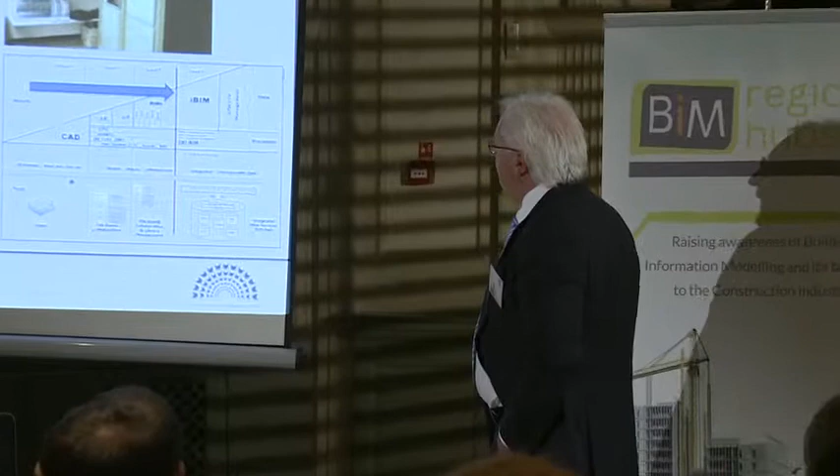For anybody who knows the history of CAD platforms, it was called Oxys, BDS, GDS, and there still are some of those extant around the country. It was a multi-user system used by engineers, architects, medical planners, administrators, surveyors, you name it. Anybody who was involved in hospitals could use that system. A bit of a forerunner to today's so-called BIM systems.

We were also one of the first digital contractors to Ordnance Survey, creating highly structured, quality-controlled information, which you probably now use as bases to your maps, although actually perhaps not around here you don't. We digitised the first 100 packages around Hanger Lane gyratory in London.

From then on, you'll see us sat in some little computer stuff there. That cost £90,000 in 1979. If you extrapolate that onwards to today, that's about 550,000, 600,000. So from then to today, I've been...

Involved in working with people to cooperate better, cooperate more, with the support of IT. In the interim years, I've been involved in quite a few national and European research projects.

Look, I'm back here at Newcastle. I worked there for 8 years, creating a large-scale, long-term property database. Likewise at Stoke Mandeville. And I've been involved in teamwork, I've been involved in Avanti, I've taught young architects - I am an architect by background - young architects, management, practice and law and business, and on into the future, researched into cyber law and virtual agents.

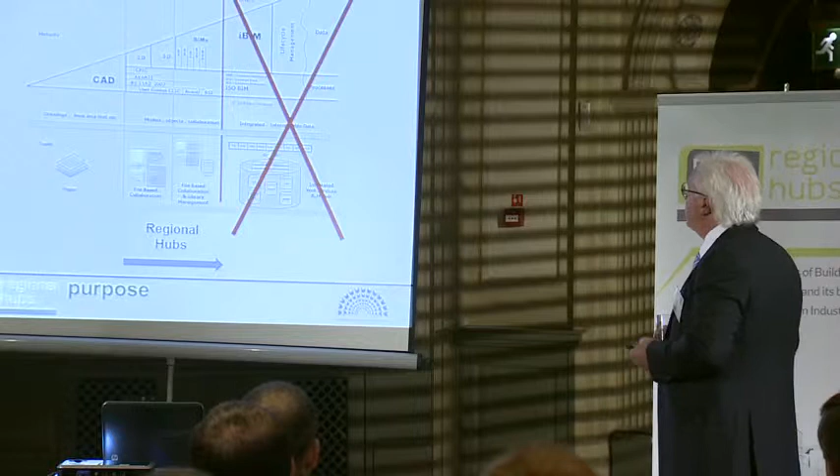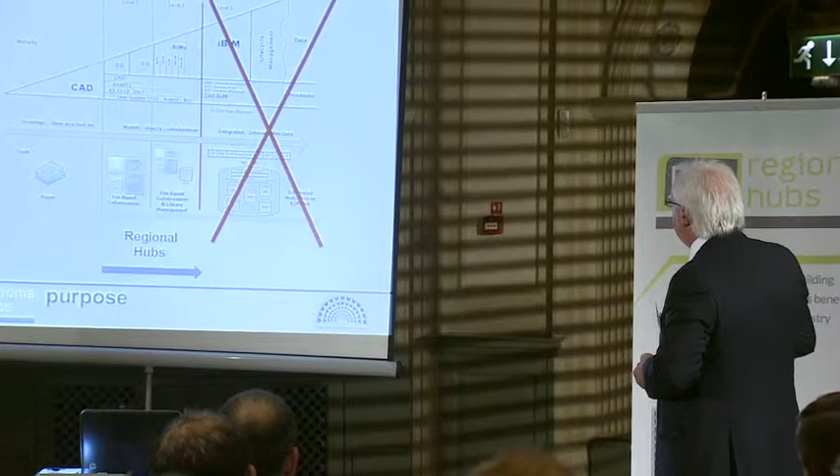What's the purpose of the hubs? Well, the big picture is to get to what is being called BIM Maturity Level 2, that red line there. But historically, as I've hinted at from that 1979 slide, we started out with paper, emails came along, 2D CAD came along, we had difficulty assimilating that into what we do. A lot of people simply used 2D CAD to produce a sheet of paper, which was passed on to somebody else who took that sheet of paper and used it as their CAD input. There's very little coordination, cooperation, benefit and impact at all at that stage.

Eventually, things like 3D came along, not just for visualizations, but for scheduling, environmental analysis, structural analysis, and more importantly, some of these things. CPIC - I was privileged to be one of the 2 lead consultants on the Avanti project, which was a 3-year project supporting people on cooperation using IT. BS 1192, I've sat on that committee on and off for a long time. These things came along and gave us the ability to structure our information better.

And that's what we've got to do even more in level 2. So the purpose of the hubs is to help people get to level 2. And how pragmatically, practically on the ground can we do that? Well, there is this thing in the middle, PAS 1192. And it's a standard demonstrating how to structure information, demonstrating how to give information various statuses as it moves through various stages.

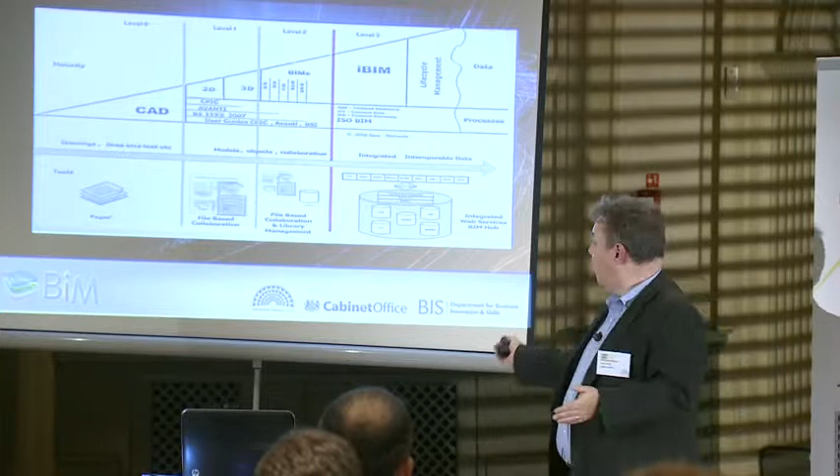Another key one is fully collaborative BIM. Steve's shown what level 2 BIM looks like, and what you will start to see at level 2, that collaboration is still domain specific. It's still an architectural model, a structural model, the FM model, and it's all federated together at a point in time for a purpose. We're not at level 3 yet in the UK, and what we will perhaps see is the supply chain going even faster and striving towards that. I think the technologies will get there pretty fast, the contracts will then fall behind. The big part will be changing behaviours. It's hard enough getting people to collaborate, but getting people to fully integrate, it'll be about changing that heuristic bias.

Most people look at that maturity wedge and I think, do they really get it? There's a slide if it comes up. I think this describes it quite well. You can start to see, again, what we're talking about is a series of models that come together, a series of data sets that are all pulled together and brought together for a purpose. It's not that single model environment as yet.

Well, what does that mean? It means from a commercial and insurance point of view, not a lot has changed. In our very first job at the MOJ, Cookham Wood, traditional JCT contract, it was very much fit for purpose. So level 2 BIM does not need a lot of ambulance chasing, there's not a lot to do. We're in the process of finishing the UK BIM protocol that will answer all these questions, and we're almost there in terms of publishing that. Lots of misconceptions around what government wants.

A lot of people think it's a bit of a fad, we'll stick our head in the sand, and hey, once Paul Morrell retires at the end of the year, it will be gone. This is very much part of policy now, embedded within the government departments. And it's only for jobs over 50 million, so it ain't going to affect me much. Well, 50 million is where we started, then it came down to 15, then down to 5.

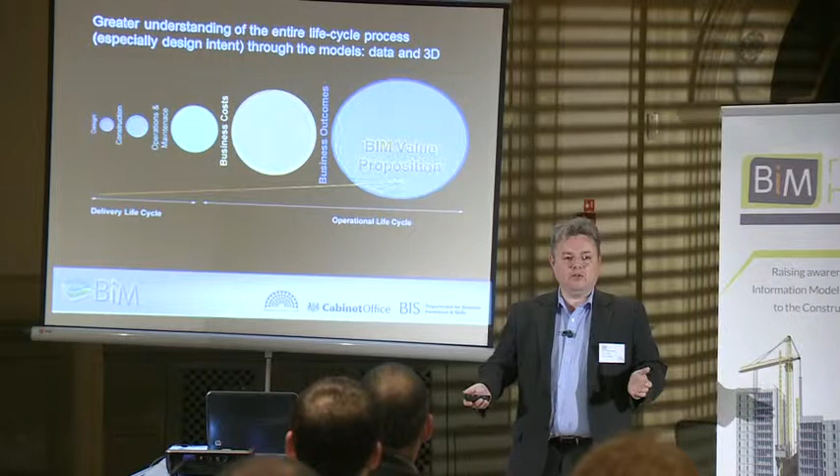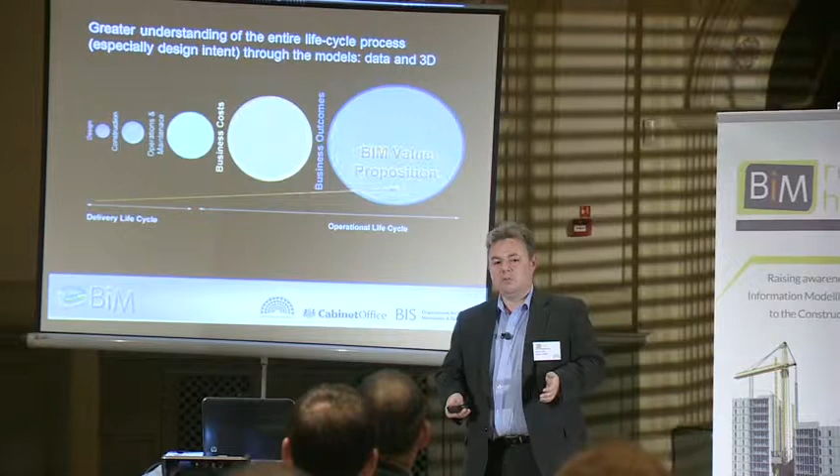The other profound thing he said within it is, well, we had this paradigm where we think about delivery life cycle - the 1, 10, 100 in terms of design, construction and operation. But the big value lies beyond delivery, in terms of operational life cycle, business outcomes and business costs.

How do we start using BIM to make better assets that are going to perform better for clients? We often design something, build it, and hope it's going to perform some way. BIM, through that 360-degree feedback loop, means we can start thinking about smarter business outcomes right at the start - start thinking about better operational life cycle, and that's where the real big saving is.

We get some good savings in terms of design, construct, but the further it goes up, the better the value proposition in terms of what BIM is. So starting to think about certainty in terms of that entire life cycle process, not just one small part of it.

As I mentioned at the start, you're probably thinking what's Forrest Gump about BIM? But we hear this all the time: we just don't know what we're going to get. We'll go through this design, procurement, construction, and we get an asset, because you've always thought about the form. Government departments are now saying start to think about performance, start to think about predictability, and give that performance I want. I think that's the big thing BIM gives you: that precision of data that can start to answer questions in a much more consistent manner, right for that whole life cycle planning.

How many people know about government soft landings? Show of hands - I think it's good, I'm quite pleased there's a bit more. As part of the government construction strategy, there is one called government soft landings, and it's not just at that point between construction and operation. It's right for that entire asset life cycle, but it starts to bring about BIM in terms of care of assets, and also asset information modelling or asset care. Soft landing is, if you like, that golden thread. Government soft landings became policy on the 20th of September. We do have a framework in place, so we will now have to start thinking, both in parallel, about data right through the entire project life cycle.

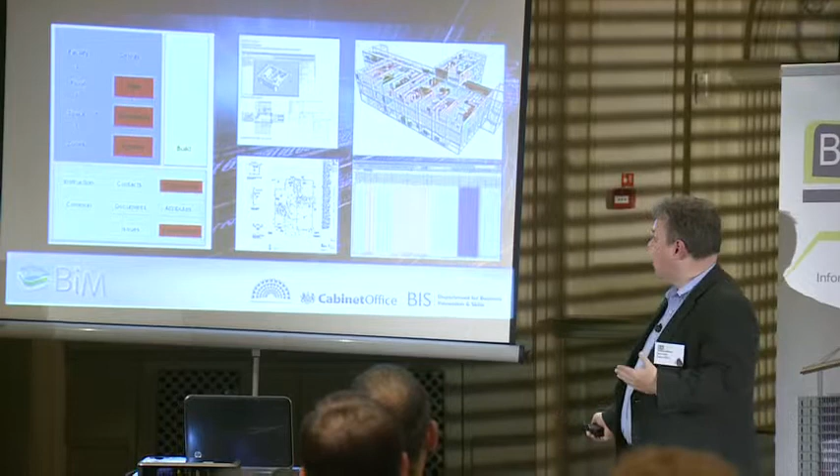So COBie, think of that as a common data set for government in that structured manner, and we'll show an example in a minute. Key thing as well, it creates that perfect landing, we can start to harvest all that information. We've got the common language, we take the data from the model, and pull it right into that asset information model. Government has at least 20 different pieces of CAFM software we need to do that with, so having that common language is certainly key. And that means we can start to get those assets to perform optimally.

You probably can't see it, but we do have a use for this, it's not just a case of asking for data. Bit of hierarchy down at the bottom, at full atomic detail, we can use it to look at systems right down to that component assembly level. The next level up, cut in a different way, we can think about forward planning, right up until we make strategic decisions at treasury level. So one data set, cut in different ways, can answer many different questions for us.

This is what it looks like. We won't go right through the whole process, but this is PAS 1192. If you sit in the helicopter and float right above it, some key features: it's a 360-degree process, it starts with the end in mind. It starts up in that top right with the employer's requirements. What do I want from BIM? What English language questions do I want it to answer for me? And you can see these red and green footballs, which are a series of data exchanges.

These are the points that the client wants his question answered. So stage around about data drop 2, it's maybe our tender question: can I afford it? What does it look like in terms of carbon? It starts to validate the business case. And then it starts to move from construction right the way into operation. We get the perfect handover, and you can start to see our feedback loop.

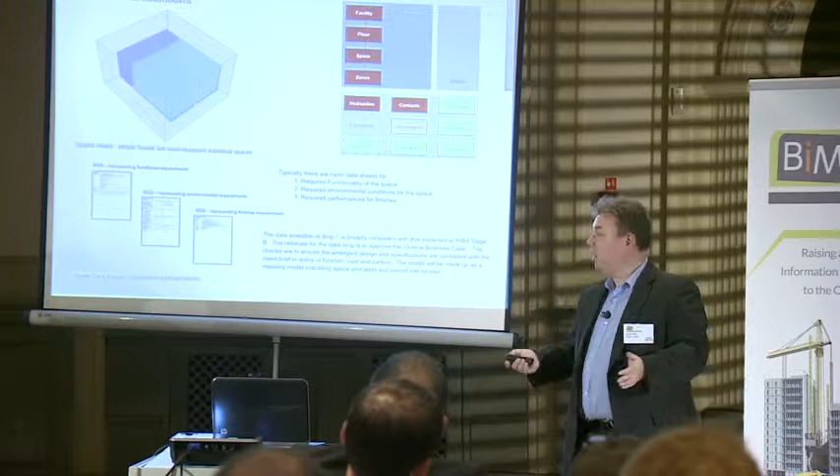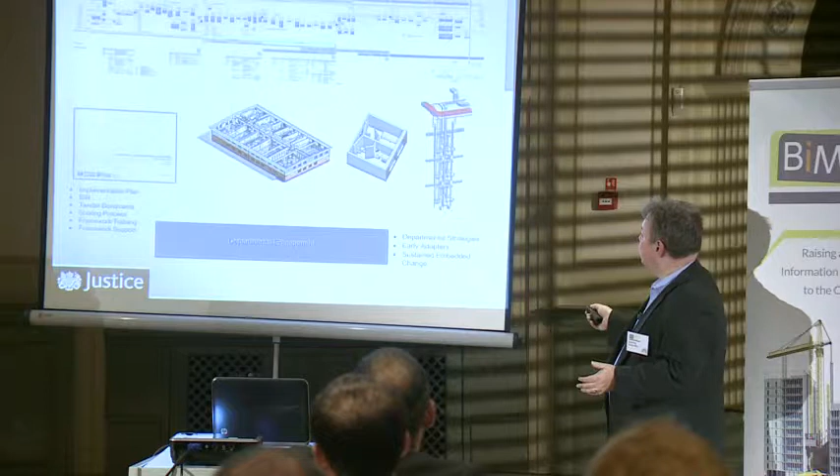You can start to see up at the top, this is their entire process - we actually replanned their whole system with them, and they're probably about 10 metres along that wall. We start to see their process, so actually leaned their process for them.

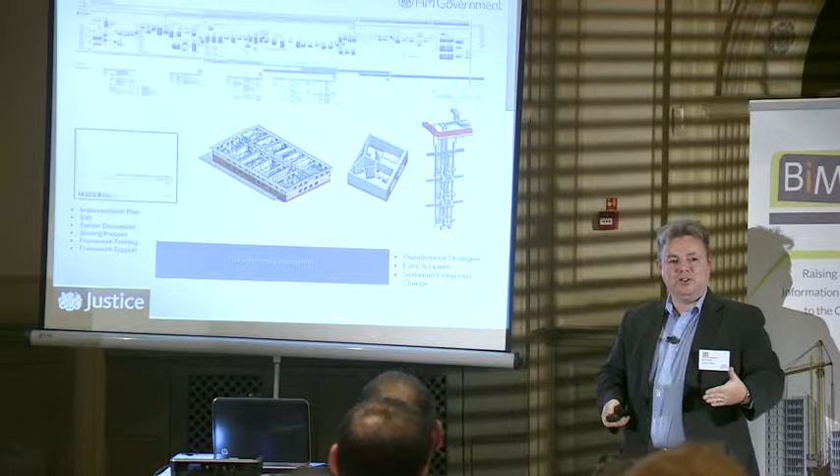If we stopped at that point without doing any of the technologies, there was still a heck of a lot of value in it. We then said, well, where do you start to make decisions? You can see these red dots that were key decisions for them in their process of making, as they had tried to procure and operate that asset.

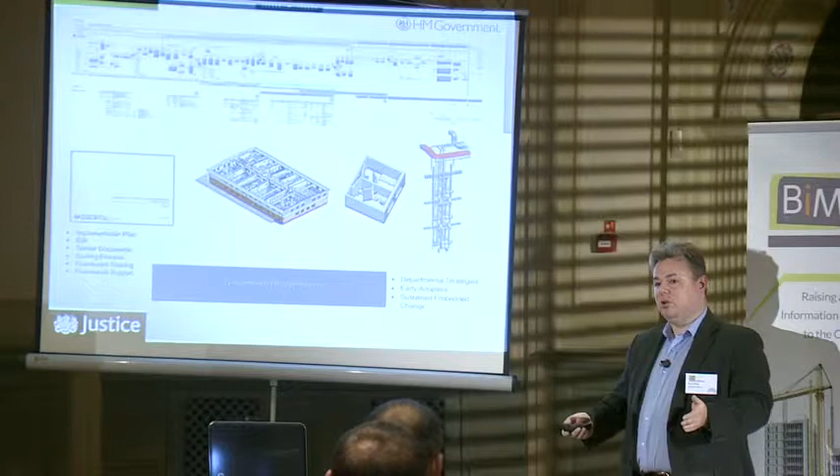And they actually then said, well, at that point in time, you've got to answer some fundamental questions. You can start to see these matrices of the English language questions they need to validate, which then tied in some data hierarchy to it. So that formulated for them, the Ministry of Justice, their BIM strategy at a departmental level.

We then went out and stress tested it in the very first BIM project, which was Cookham Woods, a £20 million new build prison project. It's now been tendered - Interserve won the project. They've done the first two data drops, data drop 2A where it went out to tender, and they've now done the GMP with it. What I will say is all five tenderers did manage to respond in terms of the BIM requirements, which was fantastic. What did that look like?

The very first drop, what we found is we're guilty of giving our clients too much information. But the right amount of information at the right time that can answer the questions was fine. You can start to see these quite chunky graphical blocks answer questions in terms of adjacencies and massing, and then that's all they needed. They're saying, sometimes I don't want to know about the door closer at this early stage of my project - I just want to answer some fundamental questions.

And you start to see, using the COBie data set, we cut some things out of there. The data sheets looking at functionality, performance, and environment. The next stage...

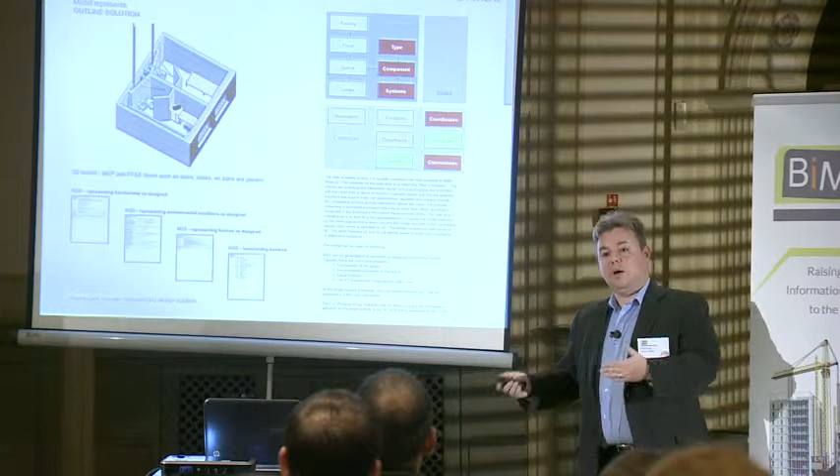Data drop, we had a data drop 2A and 2B. 2A was out to tender, 2B was what we got back. We looked at the delta - had the contractor given the client what they wanted. You can start to see in terms of a schema, and this is round about RIBA Stage D, whatever RIBA Stage D is - I'm sure it'll be something new next year when they get the new numeric form. But you start to see we're starting to populate with some of the generic furniture going there. When it comes back to the contractor, it's then populated with something specific to them, and we're starting to get more and more data into the model at that point.

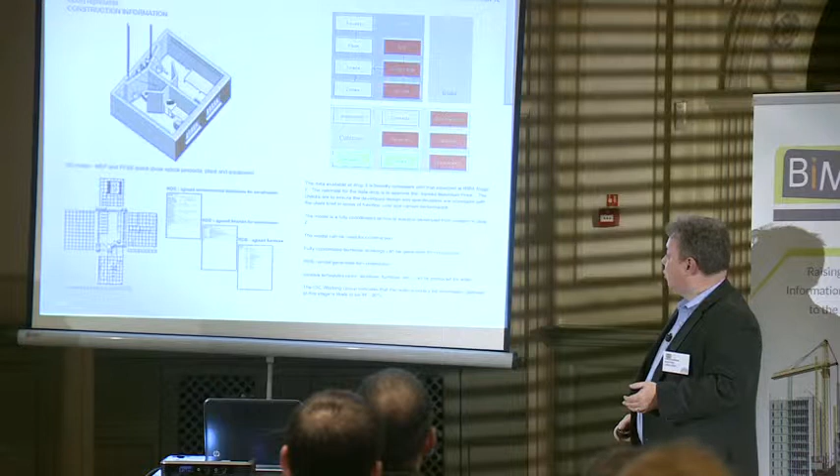Data drop 3, we're starting to get explicit construction information. We're starting to cut more and more now from the model as we go. At that point, we're around about RIBA stage. Well, we've moved on one. But at this point in time, data drop 4 up to RIBA stage K, we're starting to take all the information right the way through.

So we're well on now with MOJ. The first project's out, and we're starting to test more with them. With MOJ, BIM-enabled team, we help them, but they are, through training, starting to become BIM indigenous. They don't need the help of the task group as they start to move forward.

We met with P21 yesterday, starting to get them. We're on the journey of the Highways Agency. So having tested and refined the model is very much starting to make that real. And we've got a team of at least 6 support officers via the CIC starting to help the government department.

So we stress tested the level 2 model. You can see the data drop, the English language questions that need validating, and it starts to pull it all together. We've now been through that with soft landings, and the two of them are lined up in terms of data drops. You can start to see this in terms of a linear project with the Highways Agency. So it works exactly the same with a linear project as well. Same model. Some of the data exchange projects just move, determine the procurement route, but it's exactly the same model.

We've learned our lessons, we've refined the model. Just to finish off in terms of what our experience has been - if people are maybe starting on their BIM journey, the first thing you've got to ask is: what does BIM mean to you and to your organisation?

Where's it going to bring you value? Where's it going to start to bring your clients value as well? How's it going to start to make you more efficient? What does that commercial overlay start to look like? Put what we're doing, but also look at it through your own lens as well, through that other side of the telescope. How will it help you win more work?